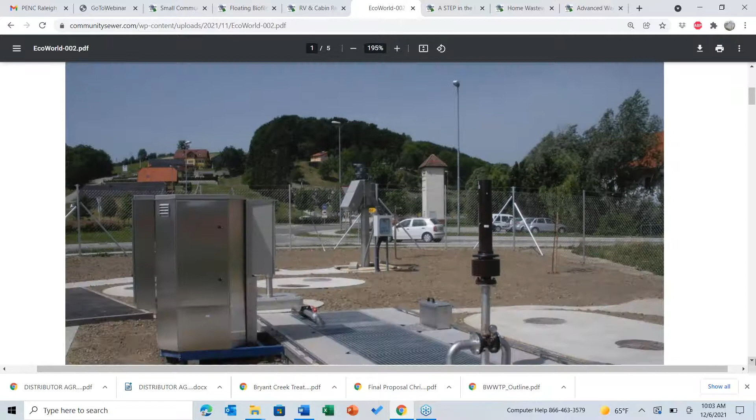I will be reading probably most of this article, maybe not all of it. You can see this, but I'll read it and you can follow along. Some of this I will skip and start a different area. In this report, I present the economic benefits of small-scale sewage plants, the cost per home, which generally is around 2,500 to 3,000 dollars per home. The difference in the costing depends on the size of the homes, the number of homes, and so forth. The economy of scale: the larger the system gets, the less per home it is.

With the cost comparison of decentralized sewer compared to a large centralized wastewater treatment plant, there's quite a bit of difference. So we are going to talk today about collection, where we offer a different low pressure type collection system, the treatment plant, and then discharge. Most of our discharge is through drip irrigation. It doesn't have to be that way. We can discharge to water bodies, surface water, through leach fields if that is what you prefer, or if your state allows a spray field, through spray as well. Most of what we do, again, is subsurface drip irrigation.

With respect to sewage treatment, decentralized solutions can often yield better environmental benefits as well. By treating the water upstream, neighborhood assets requiring irrigation can receive the treated discharge, which in turn percolates underground and helps refill aquifers. Large-scale sewage treatment plants are often unable to make use of the treated water. Instead of being recycled and returned to the aquifers upstream, much of it is discharged into rivers. We definitely are losing a lot of our water to large wastewater treatment plants. I'm in the Northwest Arkansas area, and we have large plants discharging millions of gallons to rivers, and we're not able to reuse that water in our local area where it is generated.

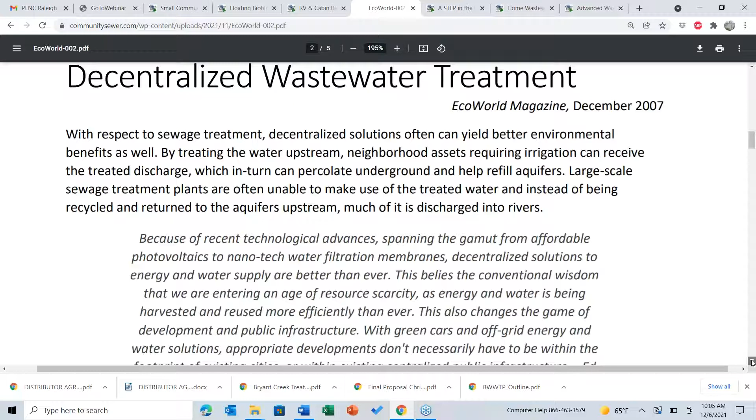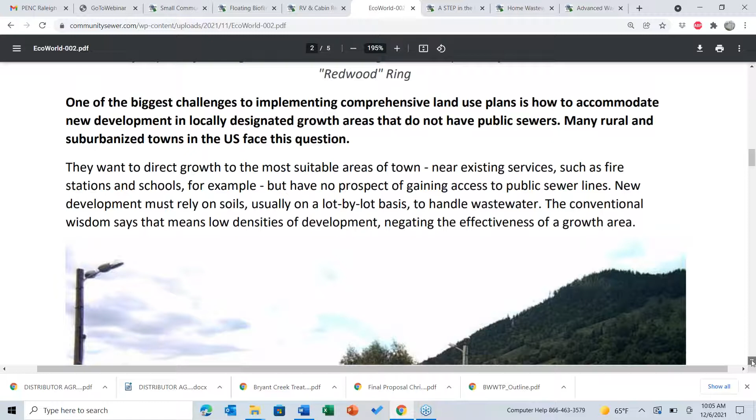One of the biggest challenges to implementing a comprehensive land use plan is how to accommodate new development in locally designated growth areas that do not have public sewers. Many rural and suburbanized towns in the US face this question. A lot of the growth today is urban sprawl and properties.

One of our benefits to the developer is that for the properties next to the urban sprawl, the large pipe, large pumps, large treatment plants are very expensive. So one of the advantages is the developer being able to go out and purchase property a mile, 2 miles, 3 miles out of town, and still get the same amount of homes through decentralized sewer, collection, treatment, and discharge all on the same property.

And the tax base for the community that they're building in will grow because there'll be more homes per acre in the rural area, as well as they're going to have wastewater treatment to a high standard. They're going to be doing away with septic systems. And as I'm sure most of you know, it's not if a septic system fails, it's when. We do a lot of retrofitting on existing septic systems in communities, which we'll talk about a little later.

So the developer is able to take a system like this and put it a little bit out of town. His property will be less expensive. He'll be able to get as many homes per acre as possible, and the wastewater treatment will be very clean.

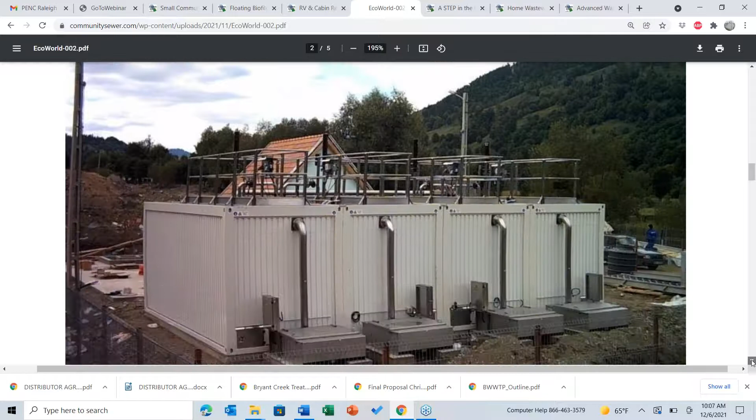This is a wastewater treatment plant that is about 200,000 gallons a day. This is in a community, as we're talking about. It has UV disinfection behind it. If you can see the stainless steel boxes, that's UV disinfection. So this treatment is a very, very high standard.

Towns and counties without public sewers have options that they may not realize. Additionally, watersheds in the United States reflect tremendous diversity of climatic conditions, geology, soils, and other factors that influence water flow, flora, and fauna. There is equally great variation in historical experience, cultural expression, institutional arrangements, laws, policies, and attitudes.

With regards to wastewater issues, it would be a mistake to impose a standard model from a federal level to address the needs on a local level. Correspondingly, centralized sewer systems are aging, frequently underfunded with respect to replacement costs, and expensive to maintain. In addition, centralized sewer strategies are increasingly challenged by environmental and social considerations such as interbasin transfer issues, aquifer depletion, nutrient loading, and urban sprawl.

We have a question. Yes. It says, I assume that the $2,500 to $3,000 per home is the initial cost. What is the annual maintenance and operational cost per home? Well, that's a good question. We also have an operations company, and what we're finding is, again, depending on the size of the system, we do systems that are 10 homes, we do systems that are 200-300 homes. The larger the system, the less per home it is.

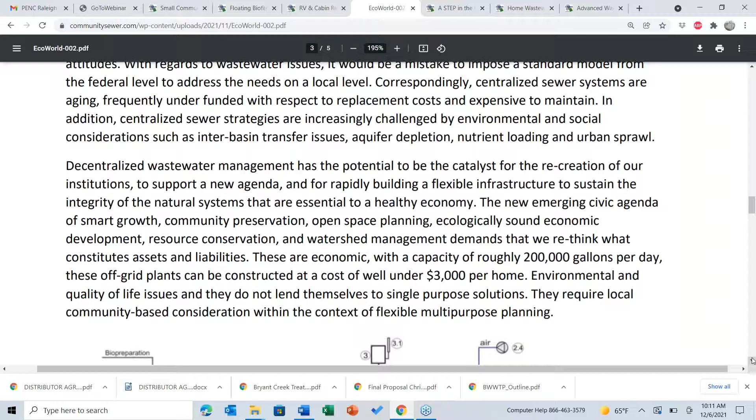So you're probably talking about maybe $6,000 per month, which would be around $70,000 a year for 200 homes, approximately, if that helps answer your question. Is that it, Nicole? Okay. Yes, that's everything. Okay. And again, that does vary. It's hard to put a number on it, but that's just an approximate.

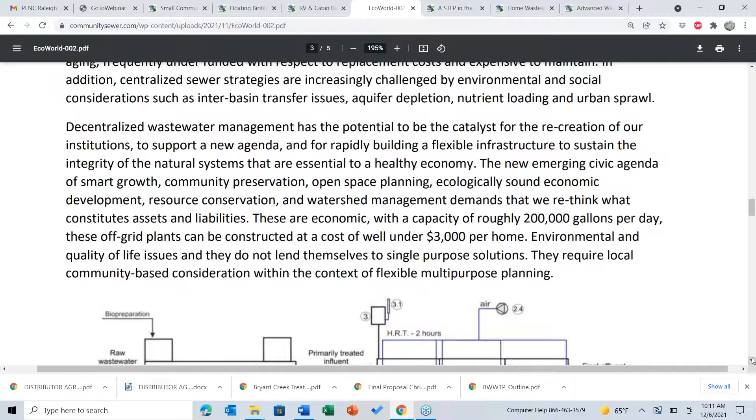That does vary. Decentralized wastewater management has potential to be the catalyst for the recreation of our institutions to support a new agenda and rapidly building a flexible infrastructure to sustain the integrity of our natural systems that are essential to a healthy economy. I'm going to skip down a little bit.

A 200,000 gallon per day off-the-grid plant can be constructed at a cost of about $3,000 per home. That is the complete treatment system as you're looking at it on the process drawing right here. In fact, let me actually take you to a different drawing, if I might. I believe it is on this page.

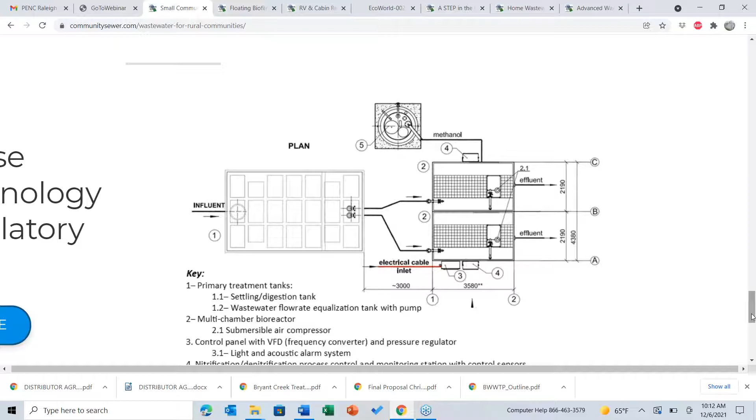So this is a system that is a gravity collection system. The influent from the tanks would come into this first tank here on the left. That is an equalization tank. So all the solids will be settling in tanks that are, let me take you to a better one. I'm sorry. Let me pop down here. This will actually show it to you a little better.

Okay, there we go. The tank on the left is a gravity collection system. It's where all the solids settle in the first tank. It acts as a settling tank, or some may call it a septic tank. The solids stay in that tank or tanks, depending on the size of the system, and the black water flows over into the second tank, which is an equalization tank.

That is then dosed to the treatment plant, which is the third tank from the left. It shows the media. That's where it's all cleaned and treated at that point. And then when it comes out to the level that the state has specified that we have to meet, it goes into a pump tank. From there, it's pumped out into a drip field in most cases.

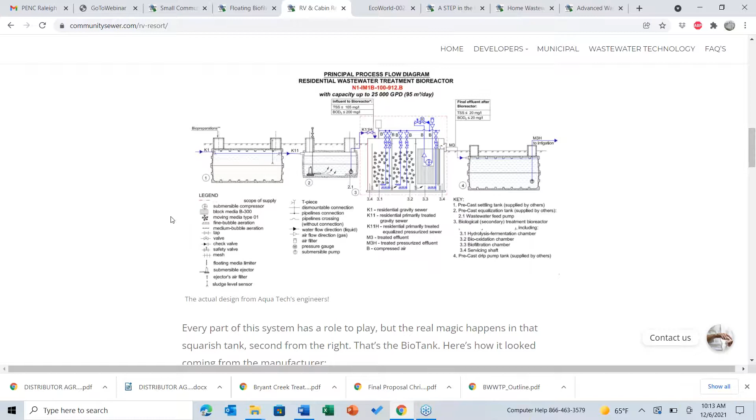So going back to that article, I just wanted you to see this process and what's included. That's where this $2,500 to $3,000 per home system cost is at. That's what's included. It doesn't include collection systems, lift stations, or whatever you may have before the treatment system. I just wanted to clarify that.

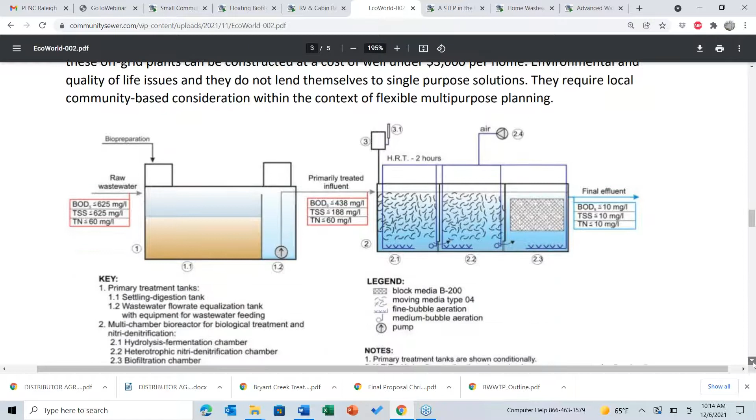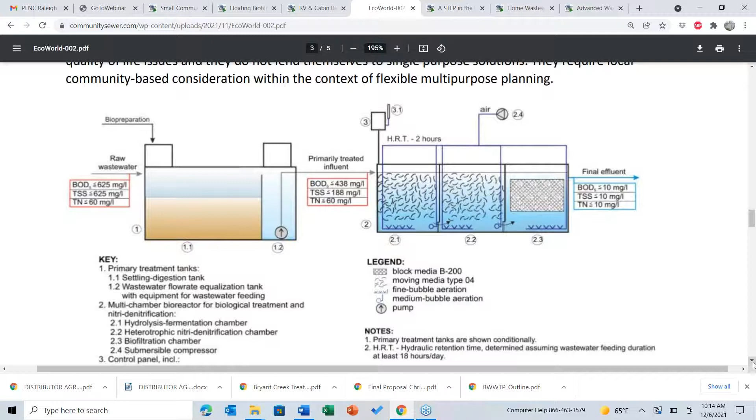This is just another process drawing. This is actually a process drawing of a large mixed use community we have in Utah. The BOD, TSS, and total nitrogen coming in is quite high. It's not residential, it's a mixed use of commercial and residential and hotels. But we're treating to a 10 BOD, 10 TSS, and 10 on total nitrogen. That's just a process drawing to look at there.

The statistics show that within the US, 25% of existing residential real estate and 47% of new construction are served by on-site treatment systems, which is they're talking about septic tanks. Many of these systems are acknowledged to be inadequate with respect to soil absorption, nutrient removal, resource protection, and public health.

Ironically, despite these demographics, the EPA policy changes, most regulatory codes as well as most municipal and commercial planning continue to consider on-site systems to be temporary solutions awaiting a conventional sewer hookup. I wanted to just pause here for a second. When we speak with developers that want to take advantage of a system like this for their development, many of them, including some engineers, have the idea that these systems will go in and eventually we'll just hook it up to city sewer or gravity sewer that comes by the area.

These are permanent systems. These work just as well and many times better than large municipal systems, depending on the construction and so forth of them. But these plants are not temporary. They can be temporary, but they're not meant to be temporary because they are a very high quality stainless steel product. The systems work well, they're designed well by engineers, and they will continue to work as long as needed.

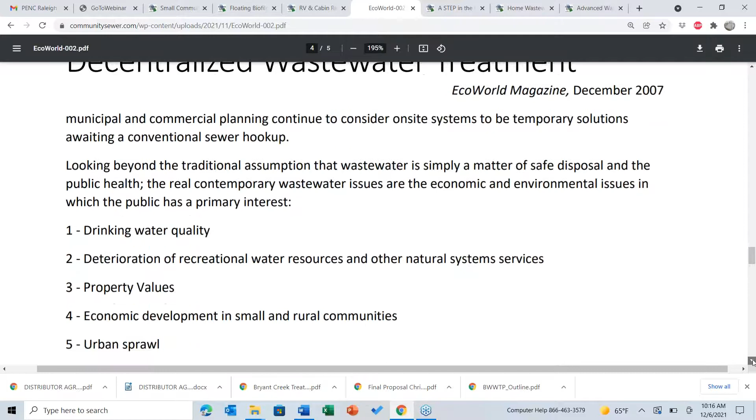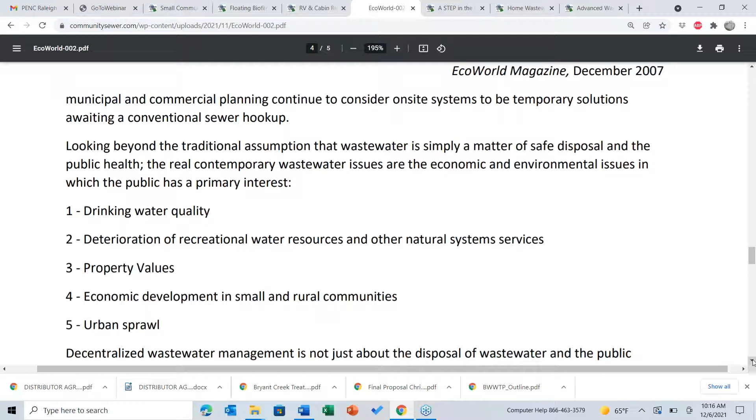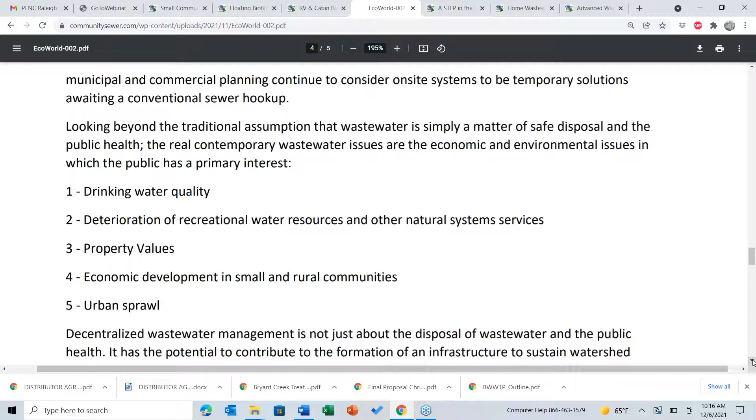Looking beyond the traditional assumption that wastewater is simply a matter of safe disposal and public health, the real contemporary wastewater issues are the economic and environmental issues in which the public has a primary interest. We're very concerned about environment. So when we build these systems and help the engineers design them, we try to take a lot of factors into account. Drinking water quality, of course, is extremely important. The deterioration of recreational water resources and other natural system services.

I don't know if you're seeing it in your designs, but it's getting quite hard to put wastewater into water in most states these days. They really try to stay away from it. That's why we're so busy putting in drip irrigation.

Property values do go up with these systems as compared to a septic community. With a wastewater system, we see the property values go up about $4,000 by using a community sewer system as compared to putting septic tanks in the ground. The economic development in small rural communities is an advantage, and it addresses urban sprawl also.

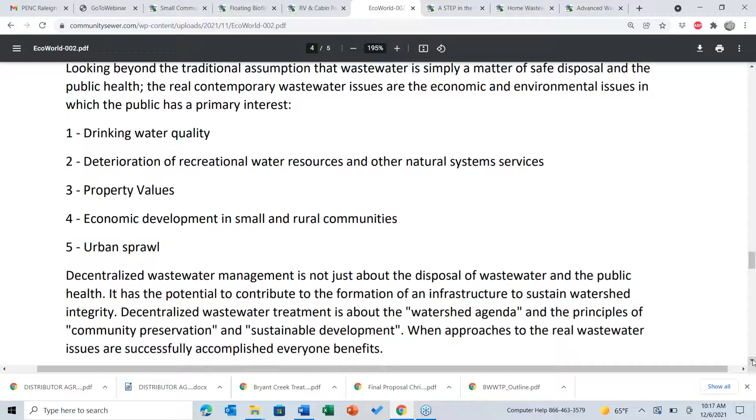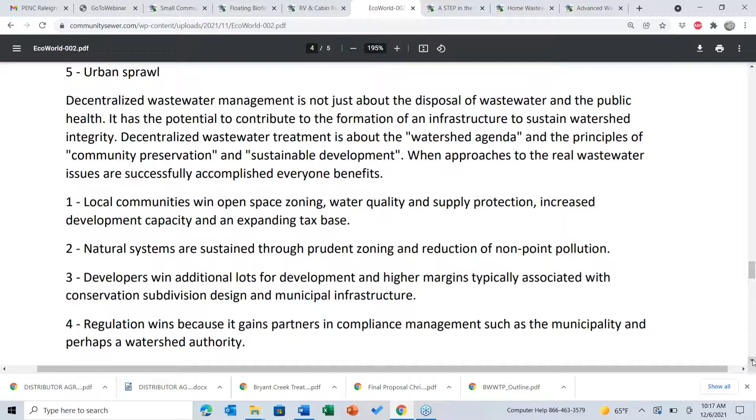Decentralized wastewater management is not just about the disposal of wastewater and the public health. It has the potential to contribute to the formation of an infrastructure to sustain watershed integrity. Decentralized wastewater treatment is about the watershed agenda and the principles of community preservation and sustainable development. When approaches to the real wastewater issues are successfully accomplished, everyone benefits.

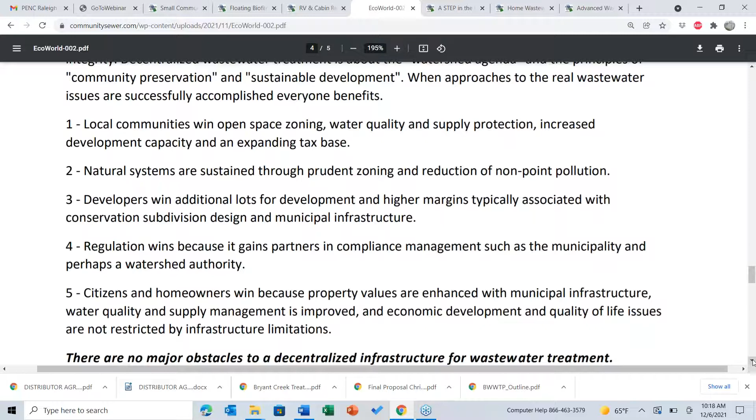Local communities win open space zoning. The natural systems are sustained through prudent zoning and reduction of non-point pollution. Developers win additional lots for development and higher margins, typically associated with conservation subdivision design and municipal infrastructure. Regulation wins because it gains partners in compliance management, such as the municipality and perhaps a watershed authority.

What that's talking about is when we go into an area, whether it be a water provider that does wastewater as well, or a municipality, a lot of these systems, when they're put in, the developers are not in the wastewater business. They actually turn these over to someone like a municipality, so they get the asset for free and they charge for sewer. So it becomes a real advantage to the municipality to work with the developer to put these in. They're getting the tax base, the assets, and the sewer fees to help maintain it. So it's a win-win for everybody.

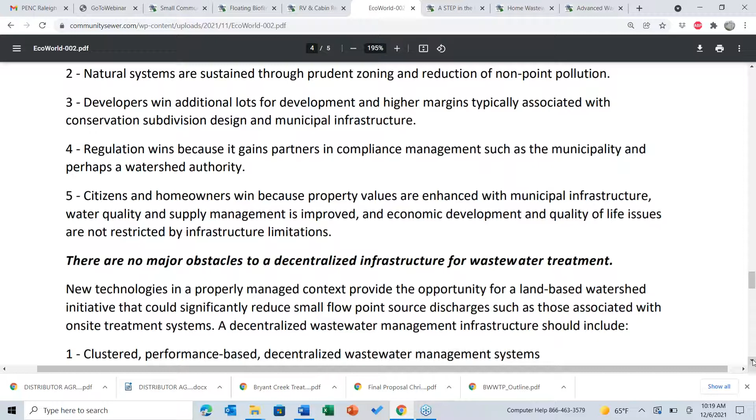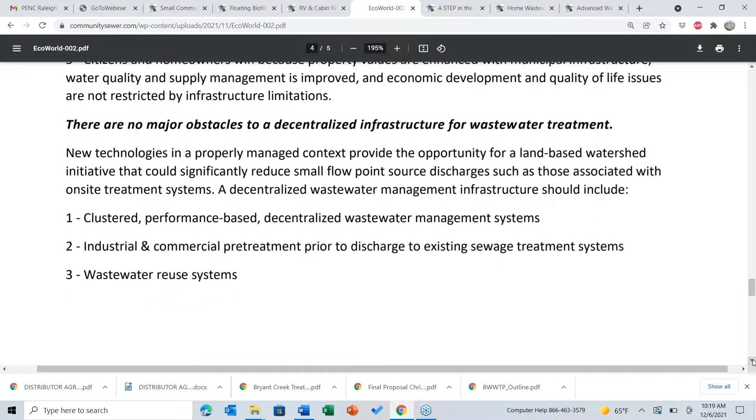Also, citizens and homeowners win because property values are enhanced with municipal infrastructure, water quality and supply management is improved, and economic development and quality of life issues are not restricted by infrastructure limitations, which they're talking specifically there about septic systems. There really are no major obstacles to decentralized infrastructure for wastewater treatment. New technologies in a properly managed context provide the opportunity for a land-based watershed initiative that could significantly reduce small flow point source discharges, such as those associated with on-site treatment systems.

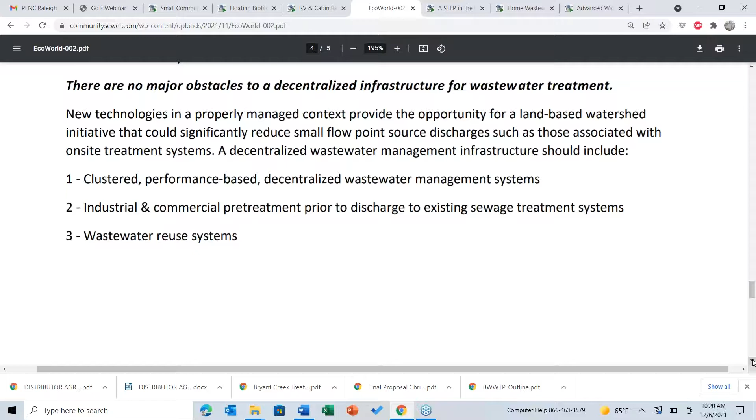A decentralized wastewater management infrastructure should include clustered performance-based decentralized wastewater management systems, industrial and commercial pre-treatment prior to discharge to existing sewage treatment systems, wastewater reuse systems. We're almost to the end of this article. Actually, we can probably end it at that point.

I'm sorry? We do have a couple of questions if now's a good time for that. Yes, sure. You bet. The first is, have you had any success in using your system to replace existing connections to municipal wastewater? Yes, actually, we have. Can I address that down the road just a little bit, because I have to show something with that, if that's okay? Sure.

The second question is, who handles the permitting and inspection of these systems? The permitting is handled by the state that you're in. For example, right now we have systems going into Texas, North Carolina, Utah, Indiana. So the engineer that is licensed within that state will do all the permitting paperwork with our assistance, the drawings and everything that they submit to the state. So the state will do the permitting. Engineer will submit, the state will permit it.

As far as inspection during installation, it's usually the engineer that's on site with us as this is installed. They do their daily or weekly checks. And then we're there for the installation. We're also there for the startup to make sure that everything works correctly. Sometimes the state health department comes out, sometimes it doesn't, it just depends on the state. For example, they're there in Utah, they're here in Arkansas. One of them was not there in Texas on an installation. So it really just depends on the state and how they work their administration and who does what. But we are there, the engineer's there for the inspection.

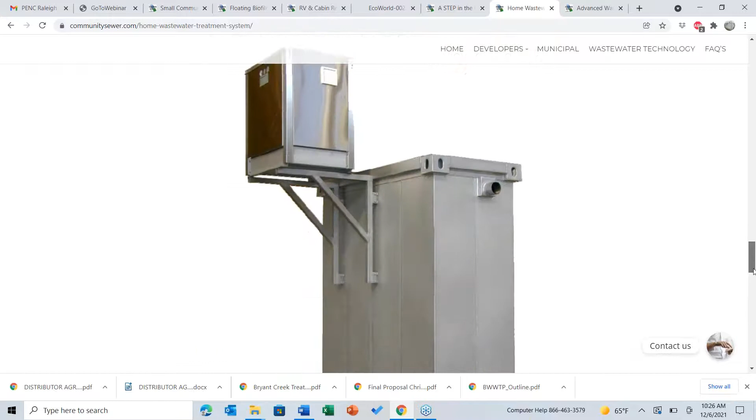It's a video I wanted to show you, and I hope you can hear. I don't know that you can hear the video, but you might be able to hear it. This is about a 1:30 video. It shows the operation of the technology. Even though it is small, again, it's the same technology as 100,000 gallons a day. So I'm gonna play this, and maybe can you hear that?

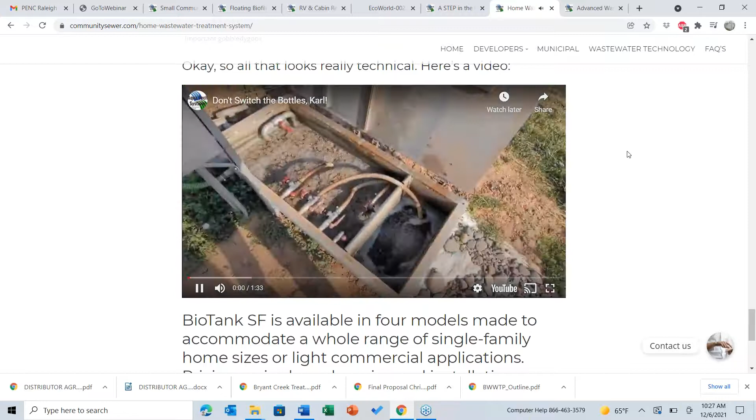No, we cannot. Okay, so what this is showing is the media. It's a chip media. It's where the biology attaches to. It's an MBBR in the first chamber on the left, moving bed biofilm reactor. The second chamber is an SAF, or a submerged aerated filter. And this is an engineer who actually has this in his backyard. He's shut it off. He's testing the water. And he's going to put it next to a bottle of drinking water.

This plant was designed for 10 on BOD, 10 on TSS, and 10 on total nitrogen. And this is without any methanol addition or anything. It's just through media. I guess I could probably make this bigger for you. Side by side with a bottle of clean drinking water. If you can't hear that, the bottle on the right is an unopened bottle of drinking water, and the bottle on the left is the wastewater treatment, 10, 10, 10 on total nitrogen.

Just wanted to show that to you so you can see the type of technology that we have and what we're getting out of the system. But we can treat to whatever standard that you care to.

Okay. So what I'd like to show you at this time is, hold on just a second here. We do have a question in the chat. Yes, can these systems test for viruses such as COVID-19?

Well, the system doesn't test it. Usually what they do is they'll test it prior to the treatment, because the COVID-19 would be in the waste, not after it's treated. So these systems don't actually treat it itself, or they probably wouldn't even treat it within the wastewater system. I would think that it would be treated prior to that in one of the settling tanks or the equalization tanks, but not after. I'm not saying they can't, but I think they try to get as close to the source as possible, which would be, I would think, the waste tank, settling tank.

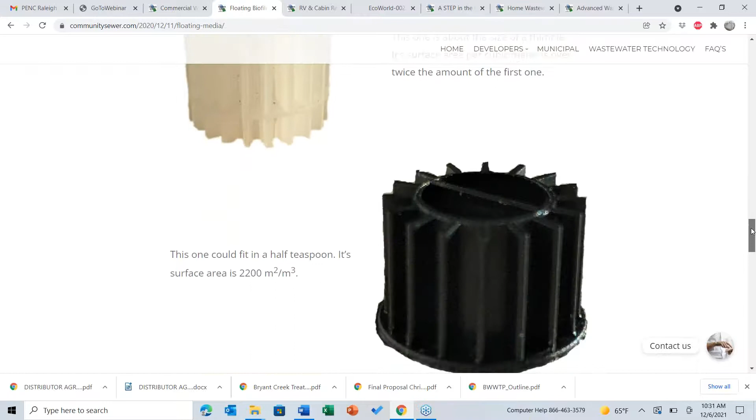This media back here is where they started many years ago. As you can see, there's only 440 square meters. As media developed in the industry, they got smaller, they got more surface area, and this is the media for the single family unit. This is the media for the larger treatment plants. Just so you have an idea of what media that we use within this.

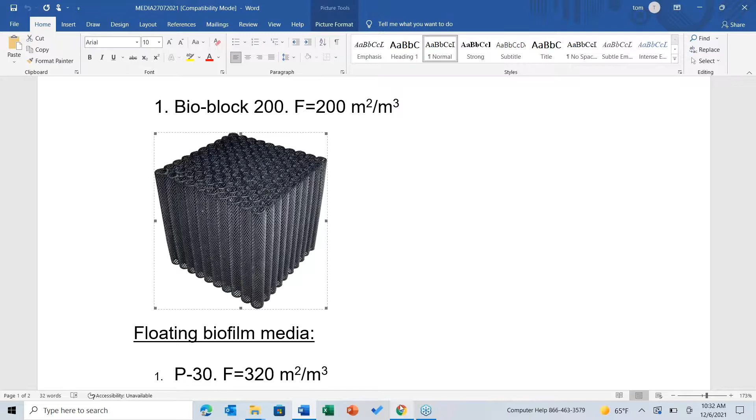I believe we have a block media picture here. This is actually the block media, it's a finishing media. So the first chamber has the chips in it. The second chamber on that particular one has this block media, and this is aerated, and it's a static media. It finishes the water down to the level that's required by the state. So I wanted to show you that media.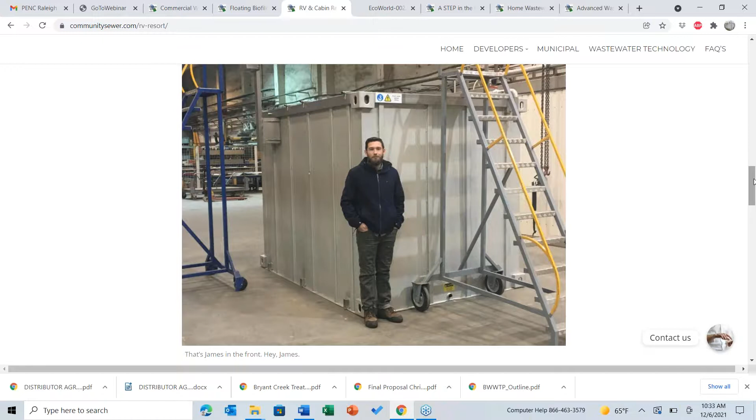We went through this a little bit earlier, but I wanted to show you an RV and cabin park that we did in Alabama. And the reason is there's a lot of pretty good information on this page. That system right there is stainless steel. This is the treatment plant. It's 12 feet long by 7 feet wide. That's 25,000 gallons a day. That's how small the footprint is because of the media and the design within that system. So that exact plant showed up on the site looking like that.

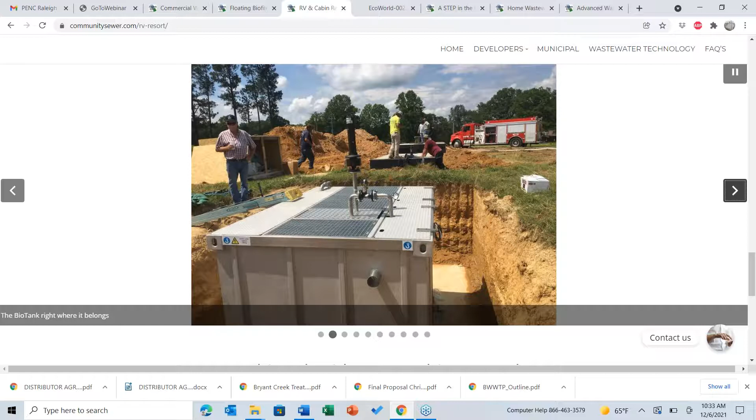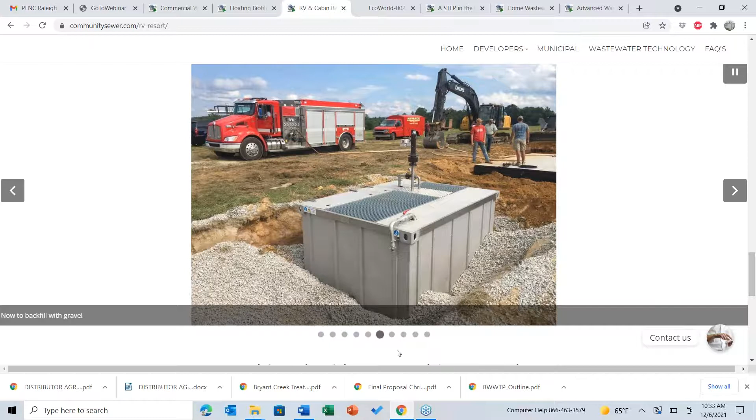This is it being installed. The first tank you see back here by the fire truck, that's the settling tank. It's where all the solids settle. The black water then goes from that tank to this tank, which is the equalization tank, and that doses into the treatment system right here. There you go. That's it being installed right there. You don't have to use pea gravel, but you can. They chose to use pea gravel on that. Another picture of it being installed.

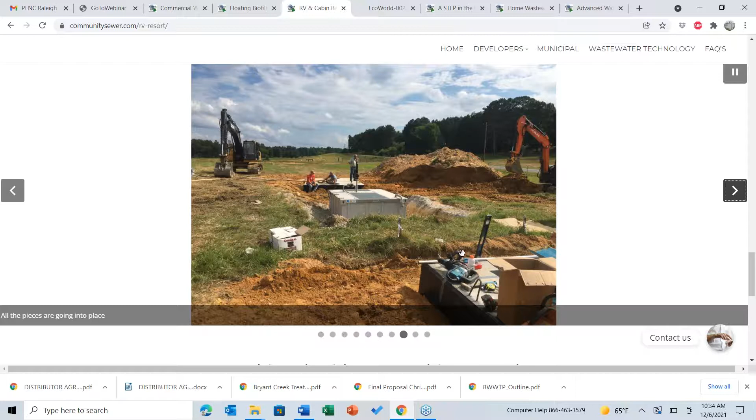This is looking the other direction. This is the equalization tank here, the treatment plant, and then this is the pump tank beyond it. And past that is the drip irrigation field where they're drip irrigating all the wastewater. These guys chose to put quite a distance between the different tanks. They don't have to be that far apart. It could even be a smaller footprint by putting them closer together. That's a picture looking back at the whole system.

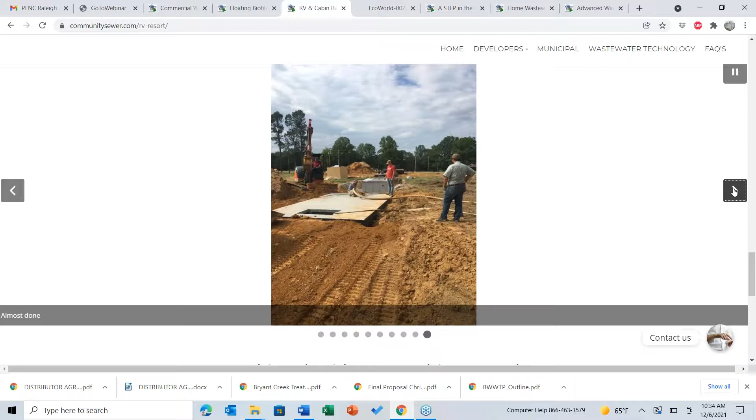Alrighty. So that's the treatment portion of it. We have many different pictures that I could show you regarding the treatment plants, what they look like. I guess we can probably go through a few here.

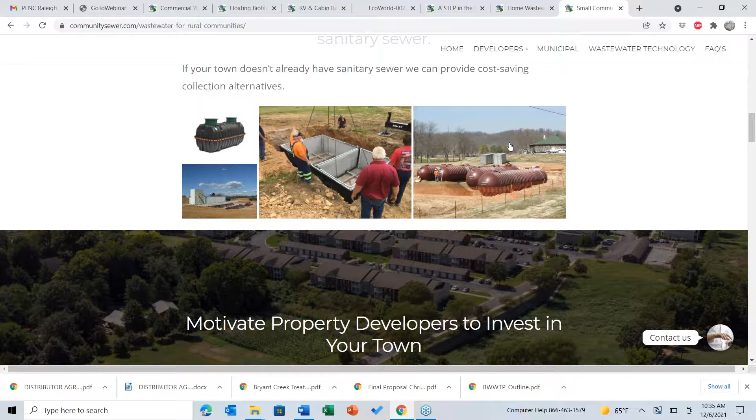So combined, this one project has 412,000 gallons a day, and it's being dispersed through drip irrigation onto a golf course. This is actually over here, on the right side, it shows the 92,400 gallon per day system, the tanks going in right before the treatment plant went in.

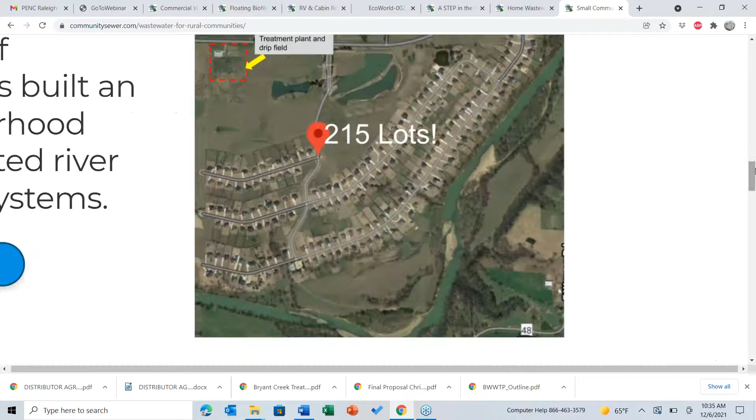This is a subdivision. I probably have a better picture of it on a different page, but this is a 215 home subdivision. And the reason I'm showing you this now is we're going to go to the collection side of this. This is on a step collection system. If you're not familiar with step collection, well, let me go through this first.

The homes, as you can see, are along this very nice White River here in Arkansas. The treatment plant's up here in the left-hand corner. That's the treatment plant as well as the complete drip irrigation field. Drip irrigation, I believe, is about 8 to 10 acres possibly. But every home has a step system, and that's exactly what this is. A step system stands for septic tank effluent pump. This is an alternative to gravity sewer.

On that particular system, where was it here? The treatment plant is up by the road. Everything here flows down towards the river. They didn't want to put in gravity collection and lift stations, so it was a modular build out for him. The developer built so many phases at a time. He used a step collection system.

At each home, there is a tank with a vault in it. So the tank looks like this. It's got 2 chambers. There's a baffle here in the middle, about 2/3 the way through. All the solids come in and settle on one side of the tank. And then there's a pass through in the baffle wall. Just the black water goes into the second chamber. And that is exactly where this product sits. This is a step, septic tank effluent pump.

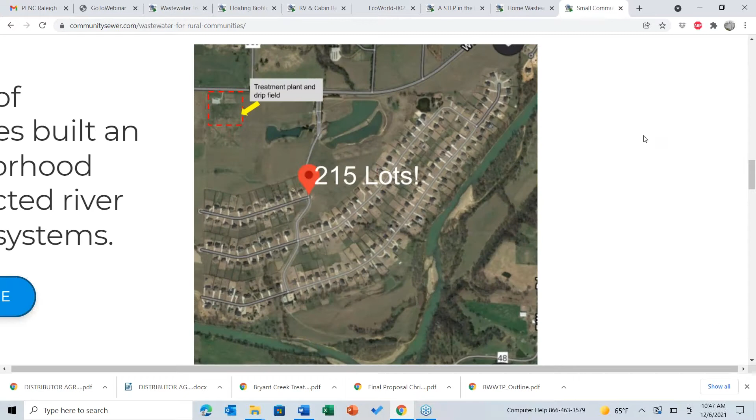So I guess at that point, probably not a lot to talk about other than what this does. And I'm looking at this from a sales point of view, if I might do that, company selling. There's a lot of environmental advantages, I believe, to this, but as far as advantages where an engineer would have a developer come to him and want him to design a wastewater system or a subdivision, whatever, I think it's good that an engineer knows that these can be put outside of city sewer on land that is more affordable. We can get 3 to 4 homes to an acre, depending on the soils.

There's a different type of collection system that actually can help save the developer money. On a gravity collection system, if you put in a 200 home subdivision, you pretty much have to put in the collection system for all the homes. It's all got to work together with the lift stations and everything. Whereas on a low pressure system like STEP, this only has to be put in as the developer builds out his phases. So if he does a phase of 50 homes or 25 homes, he's only got to put in a collection system for that amount of homes.

And there's no lift station, so it's a very inexpensive install with PVC pipe for the amount of homes that he's building. And then the builder, whoever that may be, the developer sells the lot to a builder, the builder pays for the STEP tank and just rolls that into the cost of the home. It's very affordable. So those are things that an engineer could remember to talk to his developer and help save him some money and have a better build out as well.